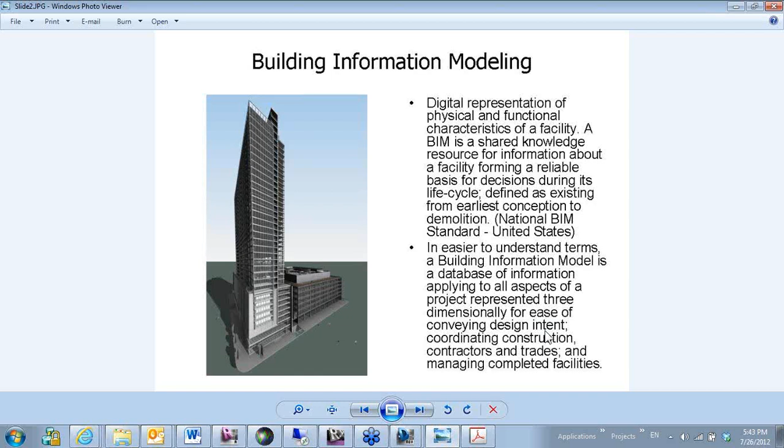I go through a quick explanation of building information modeling, and on top here is the National BIM standard, but below that I put a little bit easier to understand definition, where a building information model is really just a database of information, and it's represented three-dimensionally so that it can easily convey all of your design intent, and it's easy to use for coordination during construction, for contractors, for trades, as well as for managing the final facility. That's sort of the simplest definition I can give of building information modeling.

The integrated project delivery process - this is an effort and time diagram that I put together to explain what happens when you're moving from a 2D world to a 3D world and the type of information you need for that building information model and when you need it. The whole purpose of the software is to get all of your information and all of your decisions made before the start of construction so that it doesn't cost as much money while you're building it to change something. That's what the benefit of the software really is, and as you can see here, by front-loading that towards design development and schematic design, your ability to control cost is a lot higher, so you're saving a lot more money in the long run.

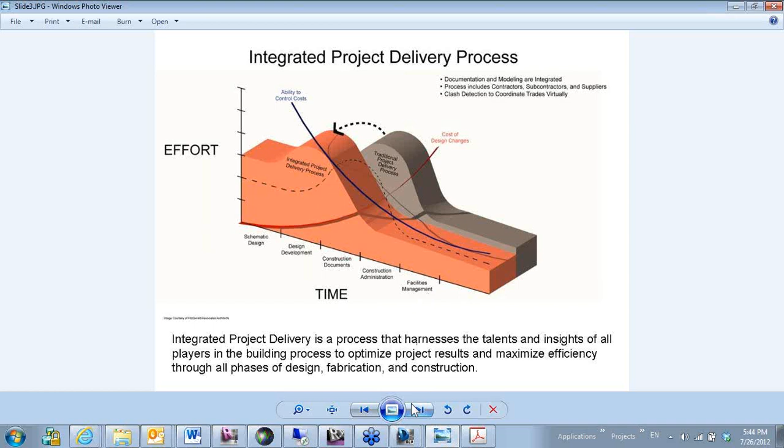The project delivery process itself is harnessing the talents of everybody that's involved in the project. So you want to make sure you have contractors on board from the very beginning in order to really get the integrated project delivery process going and maximize your efficiency for all of the phases of design.

With building information modeling, most of the softwares allow you to incorporate your media all into one location. So you're looking at your plans, you're looking at your 3D views, your renderings, even the models that you build can be printed from that 3D model all in one file, all with one software. So the bigger projects then aren't necessarily one file, but it's still relatively small compared to what we were doing with AutoCAD and having XREFs and tons of different files.

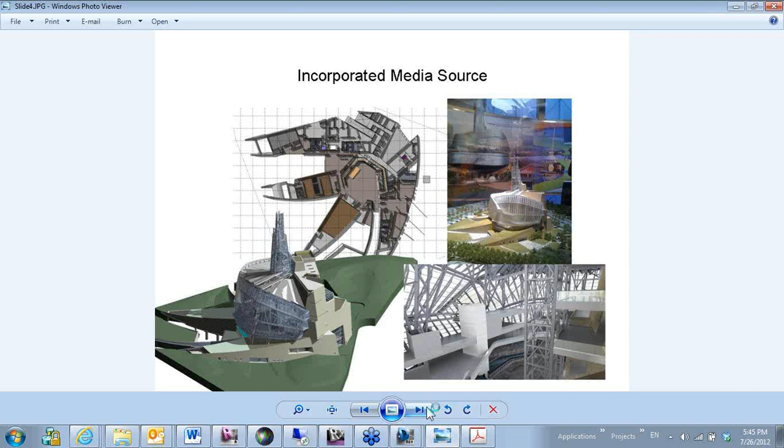And I think that kind of gets to the point as it relates to explaining BIM to executives. It starts to get into the value proposition, right? Why is firm leadership going to be interested in working in BIM? Yeah, so this is a big benefit of any BIM software, let alone just Revit. But Revit is what I'm trained in, and so most of these views are from Revit.

This view is just to show executives—when I go through it, what the benefit is for coordination. This is all of the architectural finishes on a very specific part of the Canadian Museum for Human Rights that I worked on.

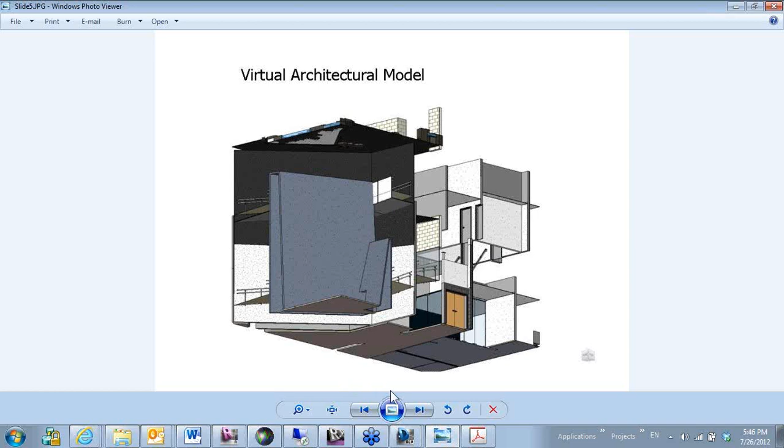It's sort of a worm's eye view looking up, but we were very specifically looking at a headroom issue on this ramp. As we brought in the structure, we could see where it was coming across, and we were going to have an issue when we brought in the mechanical with the headroom. So we did a WebEx with the firms in Toronto.

The mechanical and structural engineers were in Toronto, the architect of record was in Winnipeg, and we were in Chicago. So this just gives you a quick overview of the benefit of what this software can do—for the process, you're really streamlining everything you're doing.

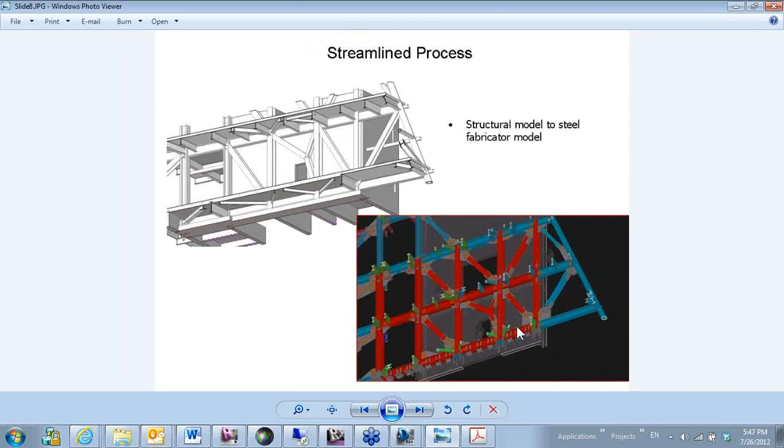This is a view of the actual structural model, which was handed off as a Tekla version to the steel fabricator. They came in, designed all the connections, and right in here you can see some of these gusset plates got in the way of one of our doors in the concrete core. We were able to flag that ahead of time and move that door out of the way so that connection could still be there.

So these are just some of the benefits. Quickly, this is a view of the structural model beforehand, and this is a view of that same area, basically taking in the same spot, but on site. So you can see the benefit here of being able to see those things ahead of time.

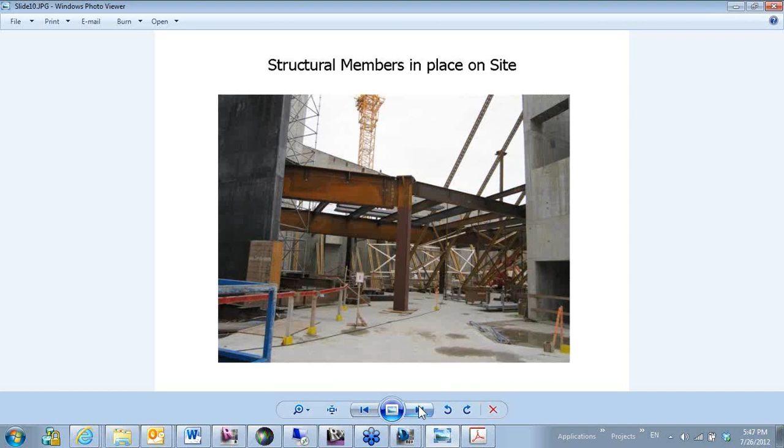So here I'm going to go through some slides and talk about quickly what the benefit of that individual slide is. I'm not really going to read everything on the slide, but for executives, when I go through here, I try to speak to each point.

For training, because architects generally have not really thought about the psychology of training, I go through and explain that people getting trained experience a bunch of different things: excitement, skepticism, frustration, and then finally an epiphany where they understand what they're doing. The benefit and purpose of what executives need to do is to really support everybody through that frustration phase and get them past it so they can reach their epiphany.

Training is generally a supplement to experience, so much like anything, you can learn something real quickly and then go to do it in the real world, and it takes a bit longer for you to really become a power user. That's what training really is—it's just a jump start.

Executives want to take advantage of the questions that are going to be asked by all the junior staff when they start using building information modeling software, because you need to understand how buildings go together when you start building a virtual model. So they're going to ask tons of questions about how the buildings go together, and executives need to support that and say, ask as many questions as you need, because the more you know about it, the more the whole knowledge base in the office goes up.

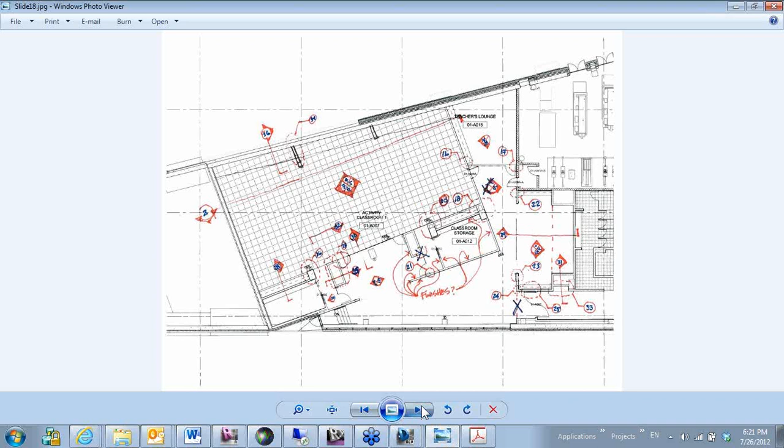To show an example, this is a view of a classroom area where I did a quick cartoon set for this specific location. I redlined it with where I thought all the details needed to be taken, threw them onto some sheets, laid them out, and then sent this over to the junior and said, can you lay this stuff out for me, tee up these sheets so we can have the beginning of a set going.

And then he came back to me and said, you showed that plan on the first sheet down here in the corner with a bunch of other views. When I really get a plan that we can see and is visible and legible, it's huge. So we need to redo this cartoon set and get it better.

So this is the sort of thing I'm talking about with planning. Once you get into actually doing this stuff in Revit, it's going to be much more time-saving if you do this all up front and get these views all set up, which means you've already got a majority of the building built in the model.

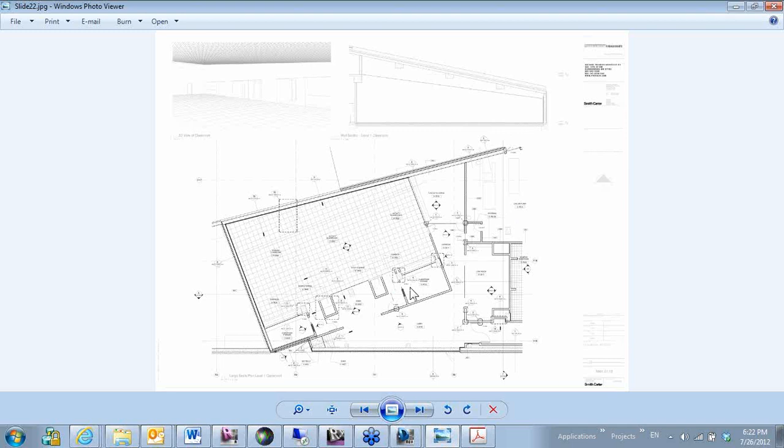The structural engineer came back, and he had built it 30 degrees parallel to the ground plane. So when I brought it in, we looked at it and went, there's a problem here. So we went to the senior who designed the original sketch and said, how do we deal with this? How do you want to deal with it?

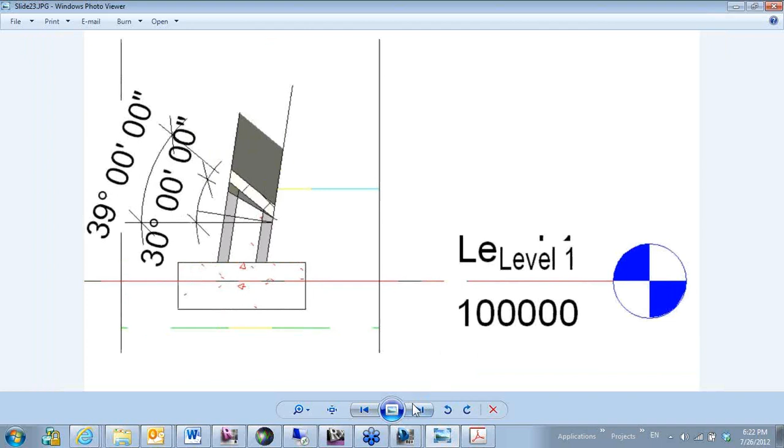And he said, well, it's actually going to be better for them to build it if the top is flat instead of angled. Let's do the detail differently. So he drew up a new detail for me so I could model it correctly and send it to the structural engineer and say, let's fix this before we get out in the field and you're spending all this extra time framing up this angle on the top of this thing that's not really that great. So this is the workflow that really helps out a lot with that.

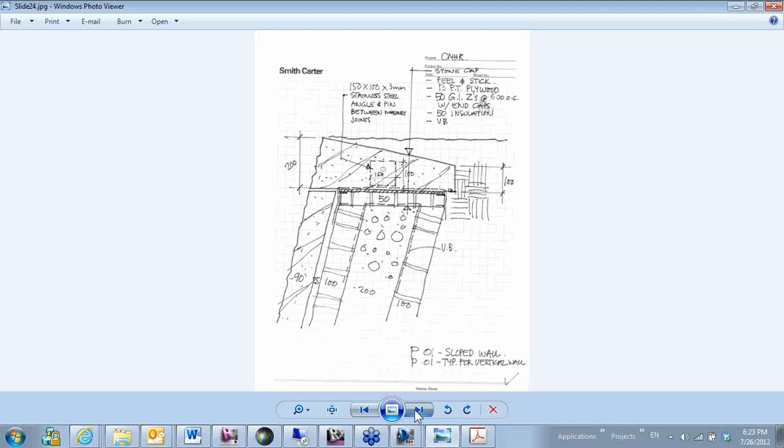Managing the expectations of what your deliverable is, is really important. One thing I want to point out with the museum: we got about halfway through construction, and it was a fast-track project, so they had gotten half of the exterior done, but they were still looking for interior information for bidding.

This is a paint schedule that was taken directly from Revit and exported into Excel, a paint schedule that the architects produce. What that means is the contractor asked the architect how much paint, how many square meters of paint, do you have in the building, all the different types of paint. This is information they asked the architect to provide.

Well, this is a Canadian project, so it's a little less adversarial up there. The architects were like, sure, we'll give you that information. And then they came to us and said, how do we do this? It was kind of like, if we would have known this ahead of time, this would have been a whole lot easier because we could have built this correctly from the beginning.

So we had to go back and figure out—now we have to copy every wall twice, turn it into a 1 millimeter paint wall on both sides of the wall, go through the whole building and do that.

And when we did, it turned out there was 24,365 square meters of paint, and there were 15 different types of paint on the walls. How accurate is that? I think it's at least 95% accurate. I wouldn't bet my soul on it, but it was a pretty accurate takeoff. It took a lot of time to do it. So knowing what your deliverable is going to be is very important.

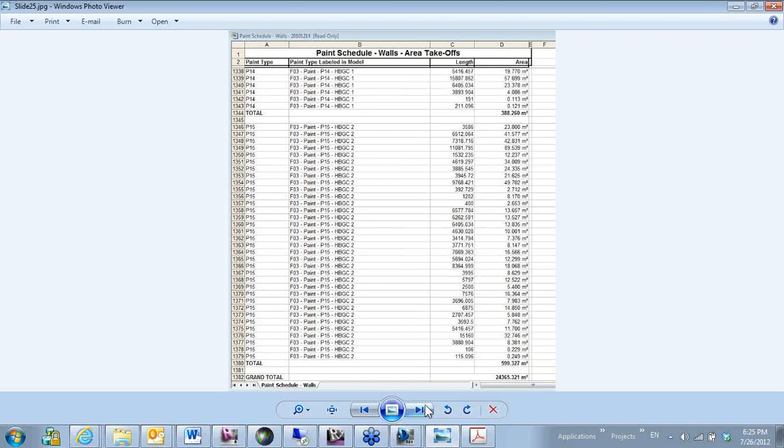And the next slide here is also another thing that they asked for, which was a drywall takeoff.

And we went through the building and created these 3D views to point out all of the different types of drywall, and how some of this drywall was up higher than a normal person could get, so they were going to have scaffolding to get up there and put the drywall up. We spent weeks creating these documents so the contractor could have this. If we'd known ahead of time we were doing that, it would have scaled those 3 weeks down into a couple of days to make sure we planned correctly. That's a huge portion of getting this information out of the model, but you need to plan for it ahead of time.

And then there are two things I would add. If you're a project manager, or trying to set up a project manager for success working on the BIM project, there's two things I think are key. One is we talked a little about this setup. If you're working with someone who's a seasoned professional, who maybe this is new to, they probably have expectations for how frequently and how rapidly the production staff is capable of generating drawings.

And as we all know from the famous diagram we all see about BIM, the workload is shifted so there's a higher quantity of work required at the beginning. So when your project manager is expecting a really nice set of drawings 2 weeks into the project, if it was a CAD project maybe that's reasonable. But if it's a Revit project, maybe that set of drawings at 2 weeks will be half as detailed, or it will take 3 or 4 weeks to get to that point. So it's about setting the expectation that it's going to take more time to get the model built and get comparable drawings at the outset. Of course, the value from that extra investment of time shows up later on, so it's really about communicating that.

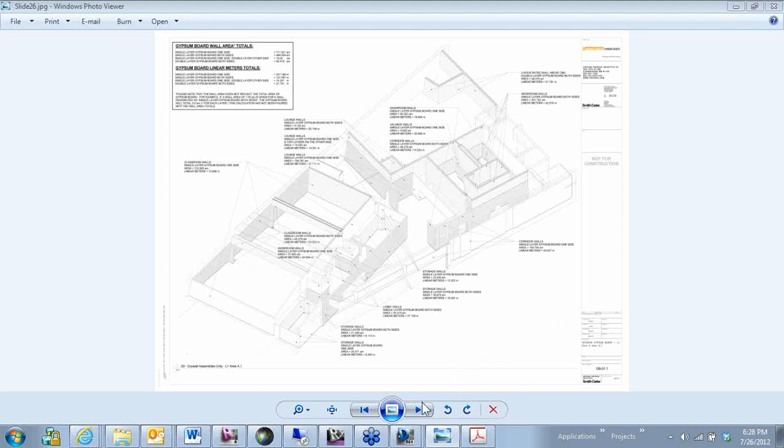We're probably going over on time here. Yeah, let's move right into this last section, and then we can have a free-for-all question and answer discussion once this last section is over.

Which is a good lead-in. Do you have slides, Brad? I do. I'm going to start. Okay, I think I start with this one, then you go into some of the stuff that you had.

So with digital coordination with your consultants and your contractors, there's a lot of things involved with what that says. The big thing is to understand there needs to be a process in place for receiving files from your consultants, for delivering files to your contractors who are also going to need that information, and how it's going to be stored.

This process needs to be set up with everybody involved, whether you're using a Revit server, or whether each individual office is building their model and uploading it to the architect, who merges them all together, or if they're all sending them to the contractor who takes them all together in Navisworks. That process needs to be there.

Specifically for architecture firms and consultants, I recommend they take those files and clean them up, because they're going to get sheets and views they don't need, and all kinds of stuff that doesn't pertain to what they're doing. Same thing when they send them out—get rid of all the random 3D views someone created, and make it as streamlined as possible, because you want those files to be as small as they can, because they'll get big fast.

I know it never happens, and it's something I always recommend to everybody. It's not very common, but we did it on the museum, and I think it helped a lot. Those files, when cleaned up and added all together, were about 1.2 gigabytes. It was crazy. So developing the ability to make a little button that automatically does all of that would need a lot of work. There are some plugins that do some of that stuff.

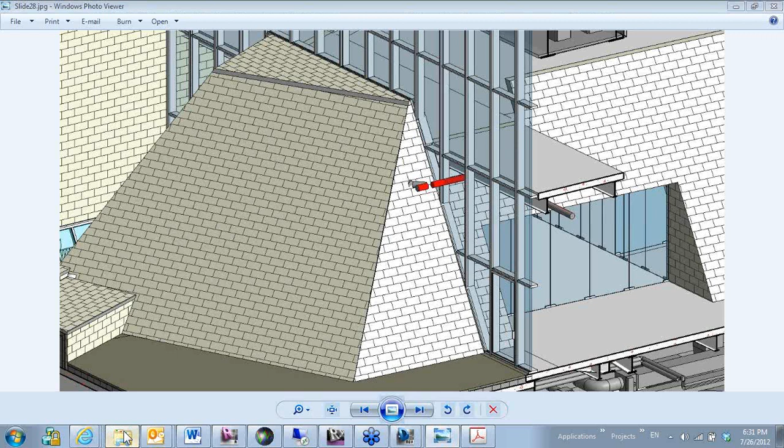So I think you've got some. I don't know, where's your folder? Right there. I made your slides.

So I think what I want to contribute is maybe just a little bit of my experience, talking about coordinating through the design process. This is a project I worked on, as you can see it was all done in BIM from an architectural perspective, including the furniture. This was probably in 2006. We had the opportunity to have our structural engineer work in BIM as well, so you can see there is some steel in this. This was sort of a prototype for actually coordinating through the design process, and it worked pretty well.

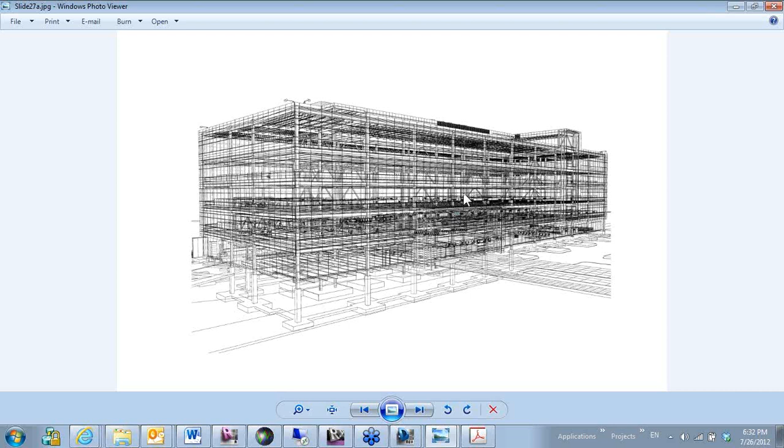What's interesting, though, is this. Through that course I was talking about in the Master of Integrated Building Delivery program at IIT, I had Richard Barrett, formerly an architect at Gehry's office, present a hotel he did in Spain. What was really interesting is he talked about something you don't often hear Gehry's projects discuss in terms of coordination, but someone asked, how do you actually get this thing built? How do you really coordinate the steel? How do you really coordinate the MEP and all those things?

He said, in a very simple way, that they literally have to coordinate everything digitally before they turn their models over to the contractor. They clash detect everything in the design process, and they do that digitally. So they deliver the CATIA model, and it's all coordinated.

So they literally built the entire thing in the design process, which at the time, at least in the world I was in, wasn't something you heard a lot about. Maybe you heard about Navisworks and contractors coordinating and clashing stuff, but you didn't hear about that design process, which is ironic because that's actually what we're supposed to be doing, right? Is coordinating. And in many cases, even though it might have been a BIM model, it was still being coordinated with overlays or a light table or some other now somewhat antiquated techniques.

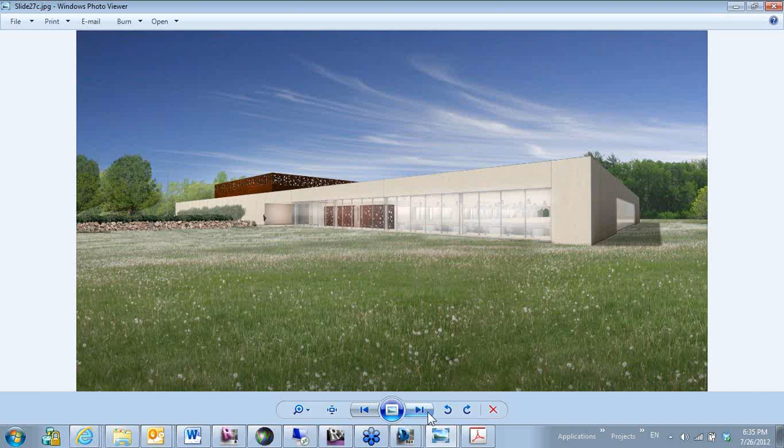So the client hired C.G. Schmidt, a contractor out of Milwaukee, early on. They worked with us probably at about schematic design when they came on board. And almost simultaneously, they went and hired an MEP design build contractor. We had an MEP design consultant who had a contract through schematic design, and they were required, based on our contract, to deliver a BIM model at a schematic level, as were our lighting folks and our structural folks, and of course we were too. So we had something we were able to kind of coordinate at schematic design, and since we had a design build subcontractor involved, at the beginning of design development we were able to take our models and they started essentially working with us so we could coordinate in Navisworks at literally the first part of design development.

So this is a shot inside that Navisworks model, and it's interesting because the discussion about BIM and coordination so infrequently includes ideas about design and benefits and value from a designer's perspective.

And here's a project that's really inexpensive. So it was not a stretch for us to go with an aesthetic that left everything so you could see it - you could see all the steel, these industrial sort of lights. Everything was exposed, right, which was a design decision.

So think about the value of coordinating in design development when you can see all the guts of the building, right? When you can determine exactly where that duct's going to be and figure out if it's actually going to be centered between the two beams, or understand the relationship between the plumbing and the ducts and the light fixtures and all these things that you can actually design. So it's not just about making sure stuff doesn't clash and you save some money - it's actually a part of the design process.

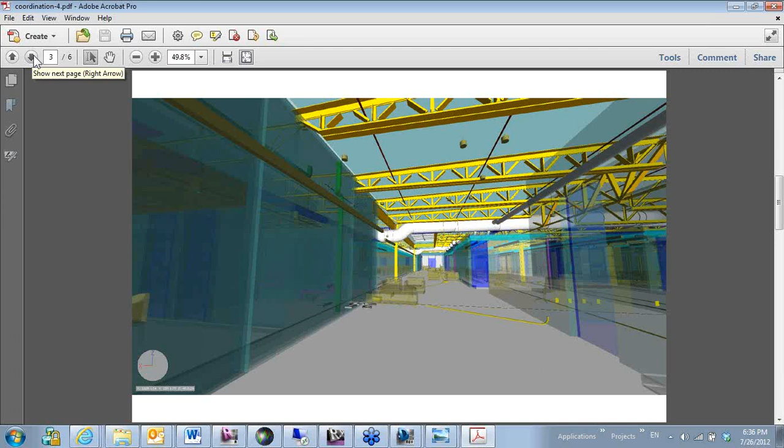So you're saying this building's like the Frank Gehry building? Yes, exactly - this is a Frank Gehry eat our dust. Well, it was just a joke, but that's the point, that you can get to that level of coordination, that's sort of the point.

In fact, two extremes, right? I don't know what the cost per square foot was of that amazing building they did in Spain - maybe it was $1,000 a square foot or something. This was like right around 120 bucks a square foot. This is a cheap building that still maintained a high design standard. I forget when he did that building - probably done in like maybe 2005. So, 6-7 years later, in Revit, a piece of software that doesn't cost what CATIA costs - $25,000 or something - for a project that's really simple, you can sort of take advantage of that.

So I guess that's the point I wanted to make. I guess we were talking about teaching, right? We were talking about how you would - so the point goes back to a lot of the things we've been talking about. It's about setting the table so that if you want to do this, if you want to be able to coordinate digitally, you have to set your contracts up right. You have to make sure you're going to get models from everybody.

You have to work with your client. Our client understood the value of working in BIM, so they hired a contractor who had experience and wanted to work in BIM, then leaned on them to make sure they could actually get a BIM model. It was because of economy—from the client's perspective it had nothing to do with design, just economy. But having those things set up and making sure everyone understands that is key. You had some things you wanted to add, Brad.

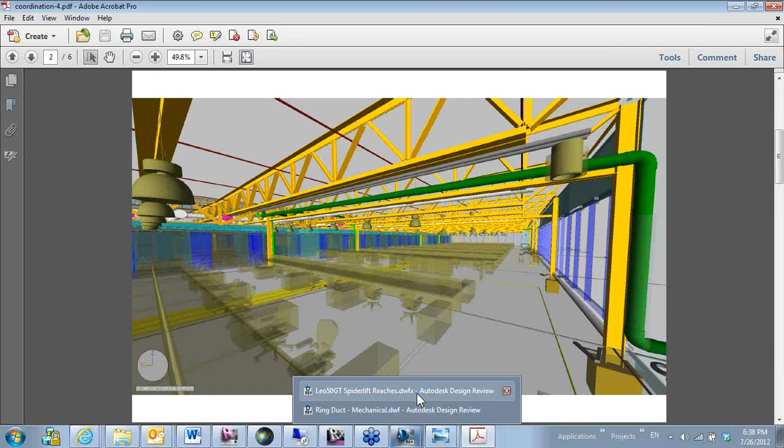I'm gonna show some things here. Part of this training, the last couple slides had to do with issues about what not to do and how to plan for the things you're not going to do. This is something everybody should do. What I'm showing here is a DWF we created. We were tasked with a meeting with the architect, the contractor, and the subcontractor for Spiderlift, a product that zooms around your site. It's got legs that go out and stabilize the base, then a boom that goes up. The whole purpose of buying this was to see if we could wash the windows on the building without having to put davit arms up on the roof. So we had this meeting.

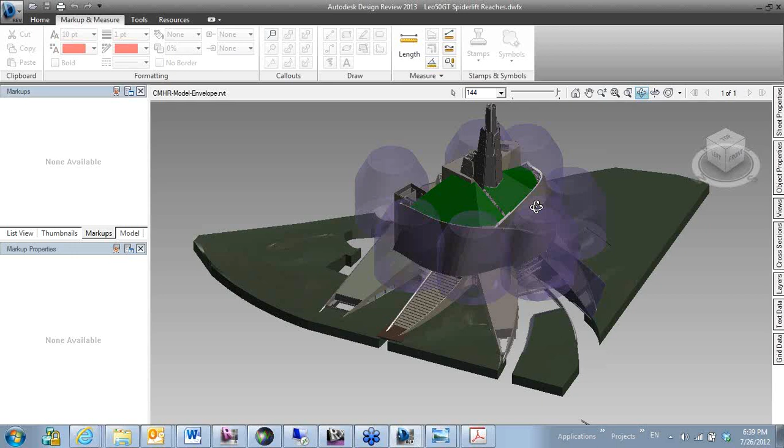A quick picture of it to show you that it is getting built, and it's utilizing BIM, I think, as well as you can. This is a good time to note that this building is the basis of Randy Deutsch's integrated design book, and it's good to see it at this stage.

I think that's it. I think those are the four topics we wanted to cover.